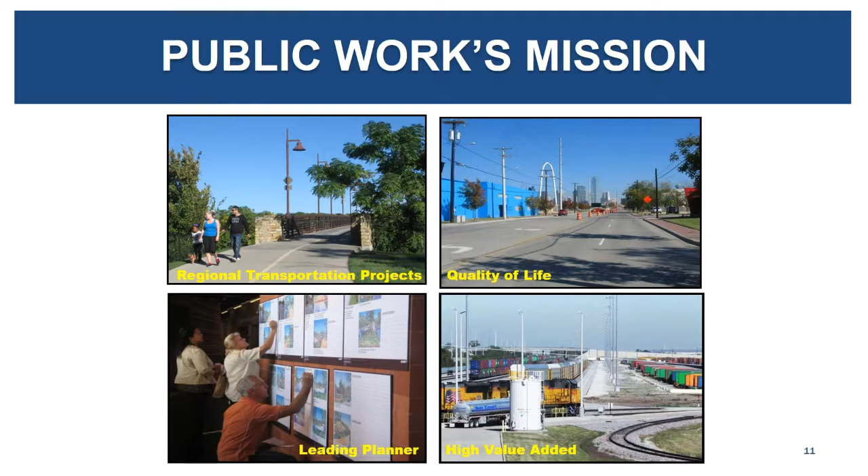So what I'm going to do now, if there's no further comments from the commissioners, we're going to go ahead and turn it over to our consultant and to Micah Baker and his team that's been leading the way, along with some other players from Public Works that are here. So with that, Micah, I'm turning it over to you to go through these particular slides.

All right, thank you, Alberta. Again, my name is Micah Baker. I'm the Senior Transportation Planner with Dallas County Public Works, and I'm also the Project Manager for the FM 1382 Sidepath from the county. As Alberta mentioned, we have Jacobs Engineering as our prime consultant on this project, and we'll have some slides coming up where myself as well as Jacobs will provide project details about FM 1382 Sidepath.

The project stakeholders or agencies who have been involved through the design of this project include Dallas County as the lead agency, TxDOT, who is a primary funding partner as well as the owner of FM 1382 and the right-of-way where this trail will be located, and the city of Dallas. We also have the cities of Grand Prairie and Cedar Hill who have been involved because of their proximity to this project, as well as other projects going on in those cities. And then we also have the U.S. Army Corps of Engineers, because this project is located just to the northeast of Joe Pool Lake. The Corps is the adjacent property owner to this trail.

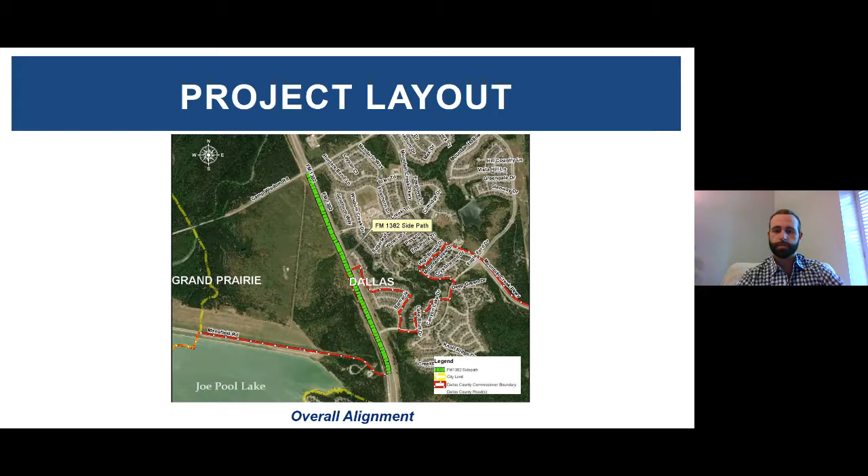So this is just a good map to show the project location. You can see the green line on this map is the FM 1382 Sidepath, which goes from Camp Wisdom Road at the north all the way to Mansfield Road at the south. Mansfield Road is the entrance to the Joe Pool Lake Overlook, as well as the Joe Pool Lake Dam. And again, that's a distance of about 1.25 miles.

As you can see, this is entirely within the city of Dallas. But if you see on the map, there's a yellow line on the south and west edges of the map, and those are the other nearby cities of Grand Prairie and Cedar Hill. And then I'll also point out the red line that's meandering through this map is the commissioner boundary line. Where it crosses our project is pretty close to the halfway point of the distance of this project. Next slide.

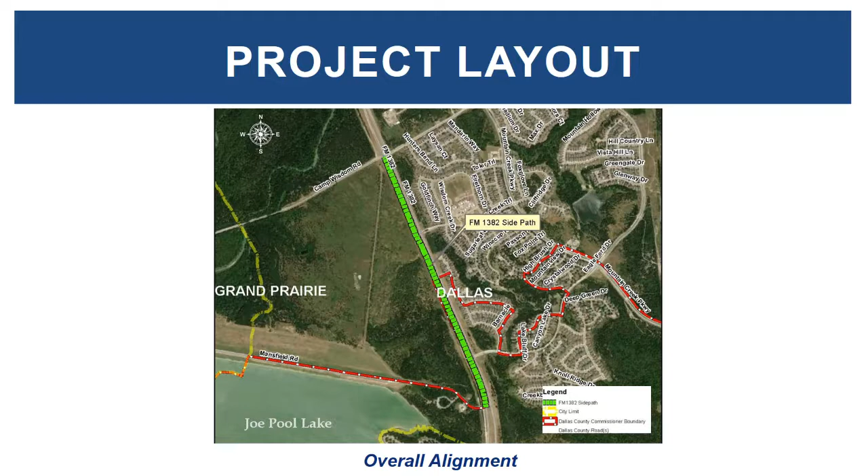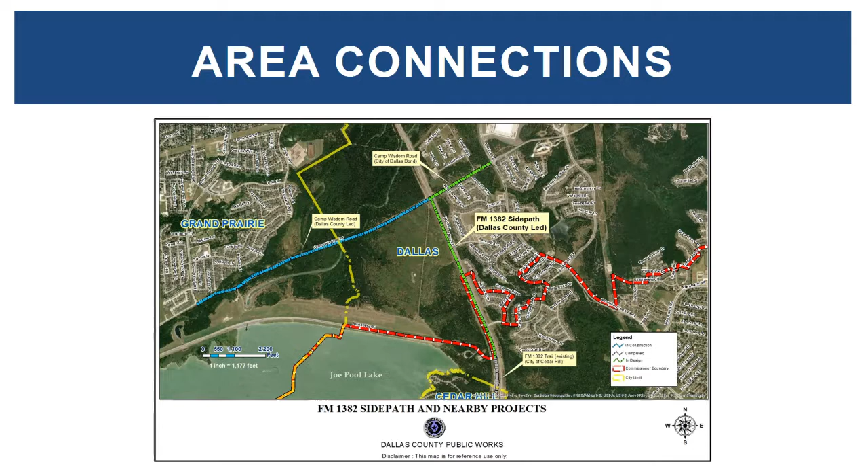All right, next slide.

So now I'm going to take you through a few photos just to give you a glimpse of the project, and then I'll turn it over to Jacobs to go into more detail.

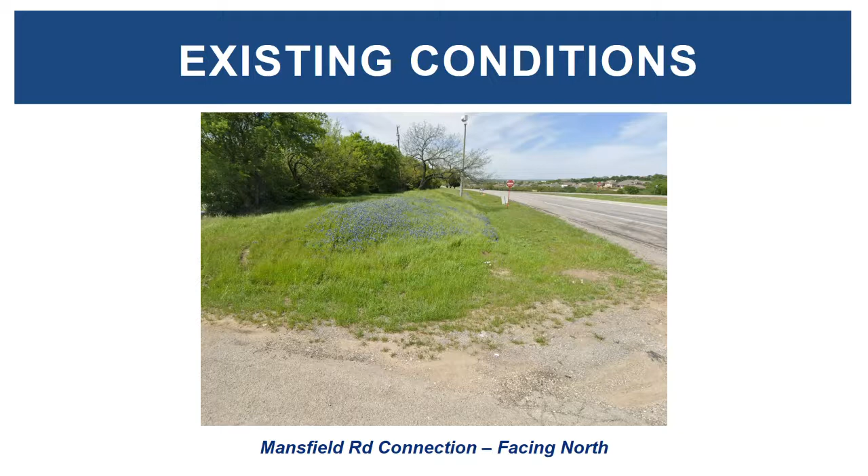This is a photo of where the trail will be located. This is the southern limit of the project at Mansfield Road, looking north. If you were to turn 180 degrees from where this picture was taken, you would see the existing FM 1382 trail that the city of Cedar Hill built. One thing to note is that if you look to the left of this image, you see a tree line that's pretty close to the right-of-way line and the Corps property. So the trail will be located close to that tree line to provide a safe distance from the vehicles using FM 1382, shown on the right side of this photo.

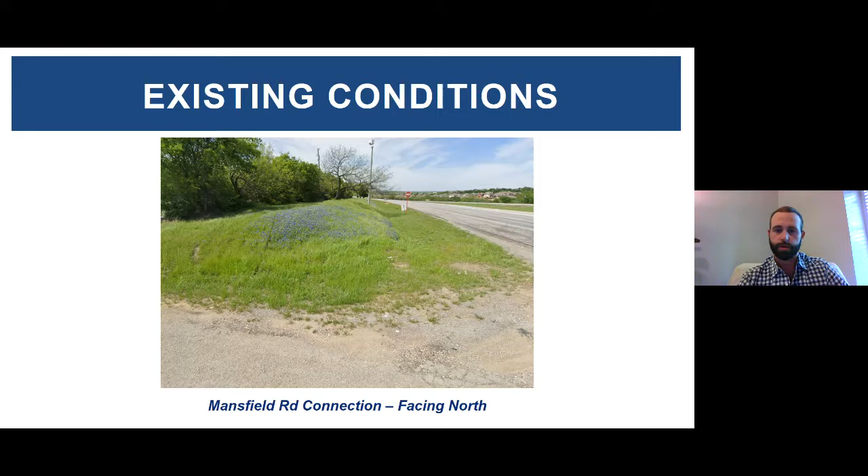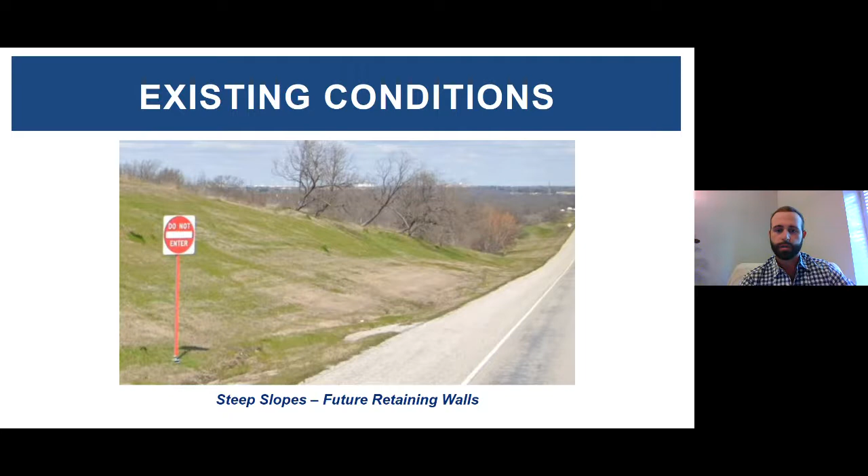Next slide. So a few other general project details.

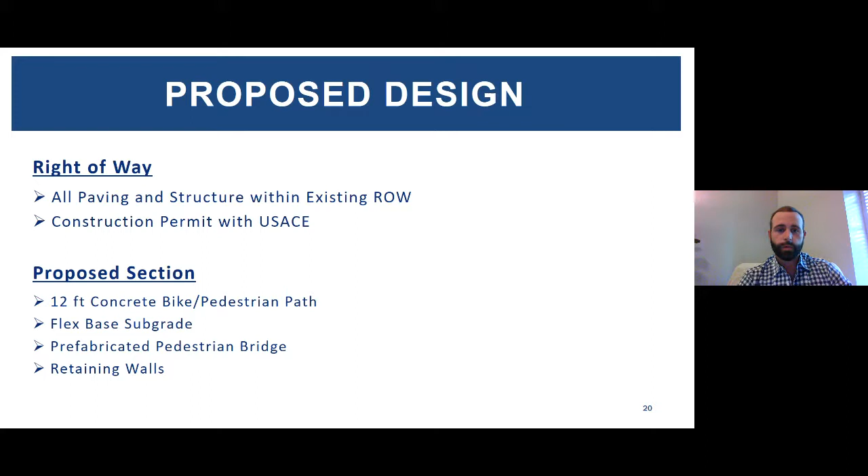Again, the paving and entire structure that's going to be built with this trail will be built in the existing TxDOT right-of-way. We do have a construction permit with the Army Corps of Engineers to provide the necessary slopes for drainage, but again, we will not be getting past their fence line on this project.

The proposed section details include a 12-foot wide concrete bike-ped path. We'll have flex base subgrade. There is one prefabricated pedestrian bridge that's going to go over the existing culvert on this project. And there will be some retaining walls throughout the project that our consultant will describe in further detail on some of the later slides.

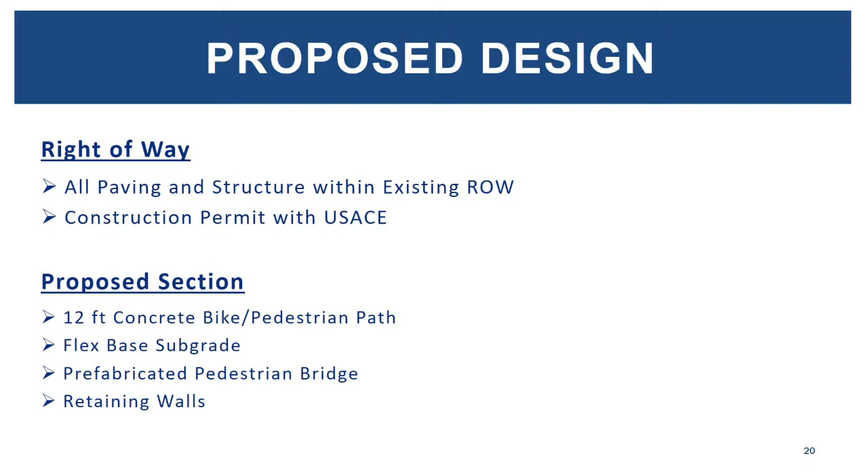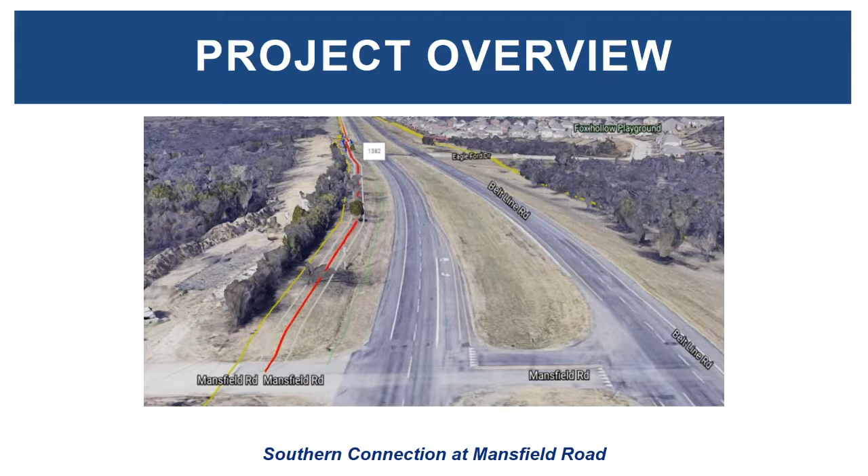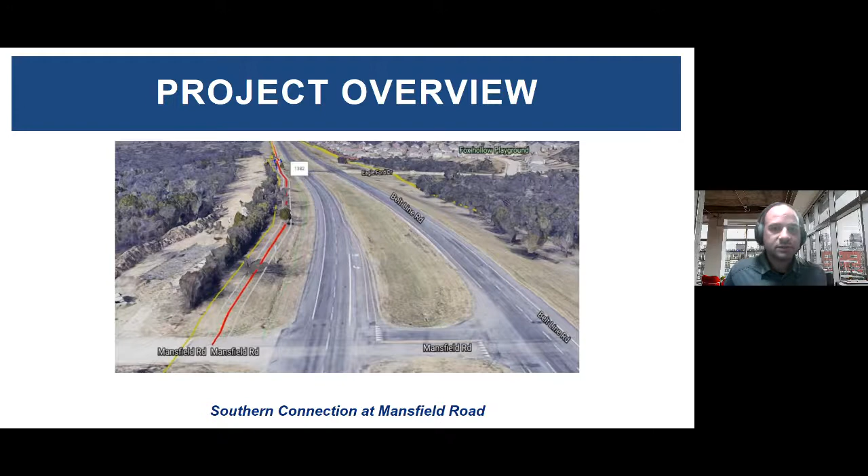We'll start the project here, as far away from the high-speed roadway as possible. We have 1382 southbound lanes, 2 lanes, greater than 45 miles an hour, so we made sure the trail was as far away as we could get it, but not outside of the TxDOT right of way.

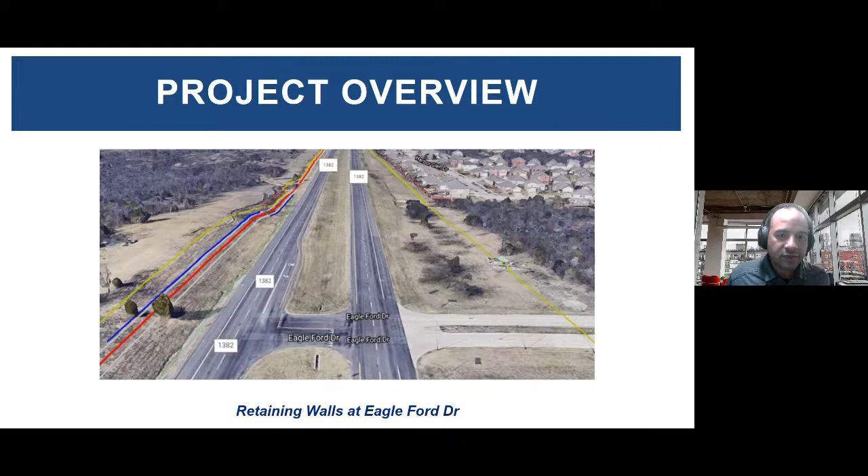As we move further north, we get into the first set of retaining walls. These blue lines on either side of the gray lines are the retaining walls. We have one on the high slope, which we call the high wall, or wall A, which retains the existing slopes coming from Joe Pool Lake. We have a 4-foot maximum wall with a flume behind it that runs and drains to the northern culvert, which we'll get to in a second.

Then we have a secondary wall on the right side, or east side, of the trail. We call that wall B, or the low wall. That is a typical TxDOT cast-in-place wall. Both of these will have aesthetic treatments matching the Cedar Hill trail, and wall B, this lower wall, will have pedestrian railing to ensure safety for everyone traveling either by foot or by bike along this particular trail.

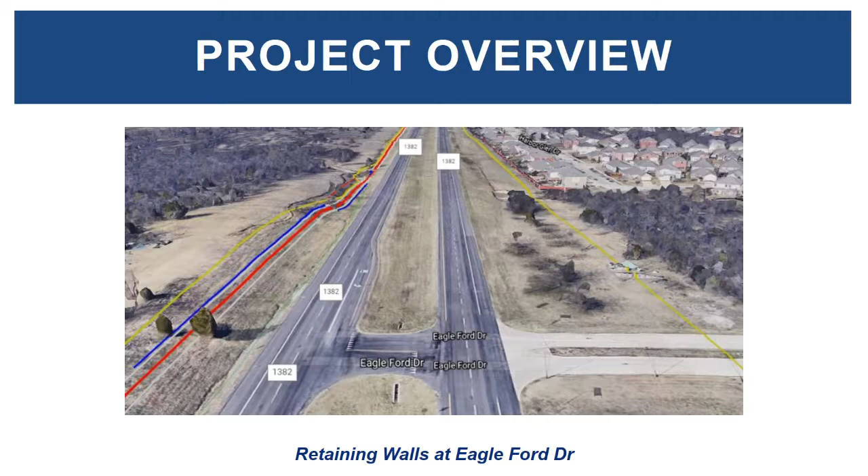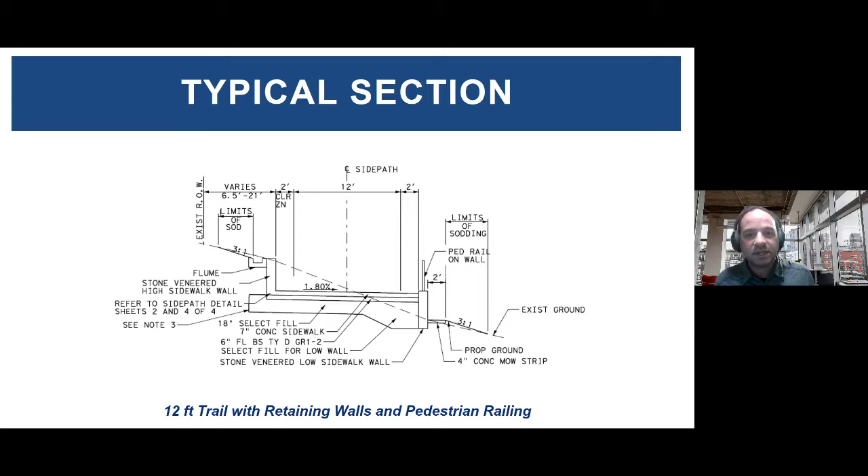Here's a typical section showing both the high wall on the left with the flume and the low wall on the right with the railing and a mow strip to allow for ease of maintenance. In this section we have the 12-foot typical trail, and we're required to have 2 feet of clear zone on either side of the trail in case you need to step off for a second. This extra 2 feet gives you that opportunity. We don't want to make anything difficult for any of the folks who use this.

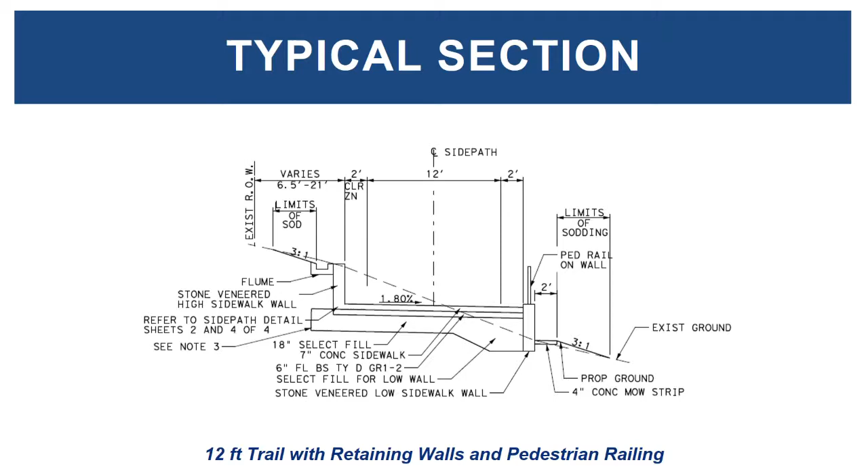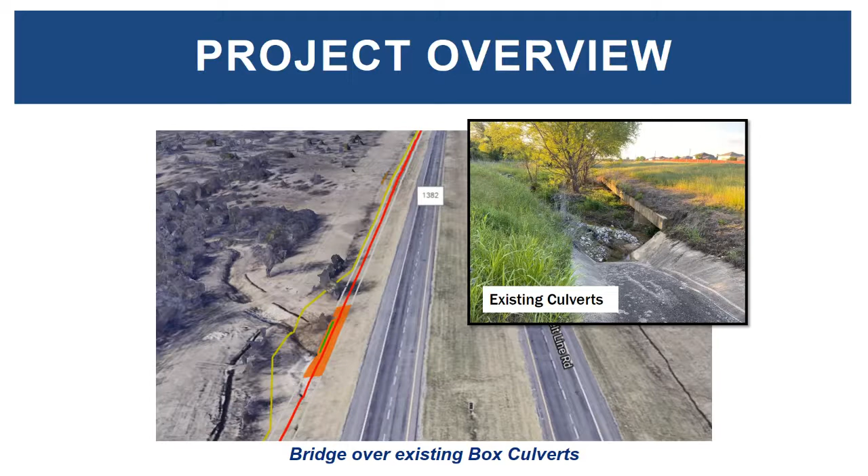As we get towards the bridge, shown here on the left as an orange rectangle, we're going to span over the existing culverts. There are 5 8x4 culverts shown in the picture in the upper right-hand corner. We will not modify any of the hydraulics or structure that's there. We would rather span over it with a 130-foot prefabricated steel truss bridge.

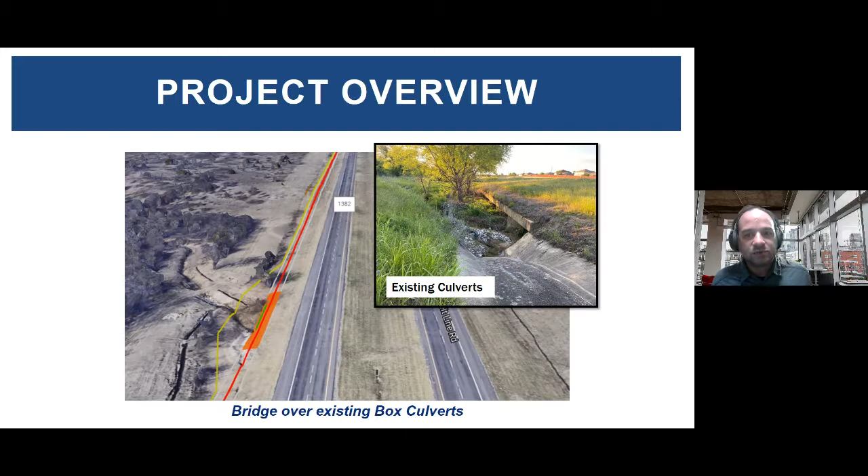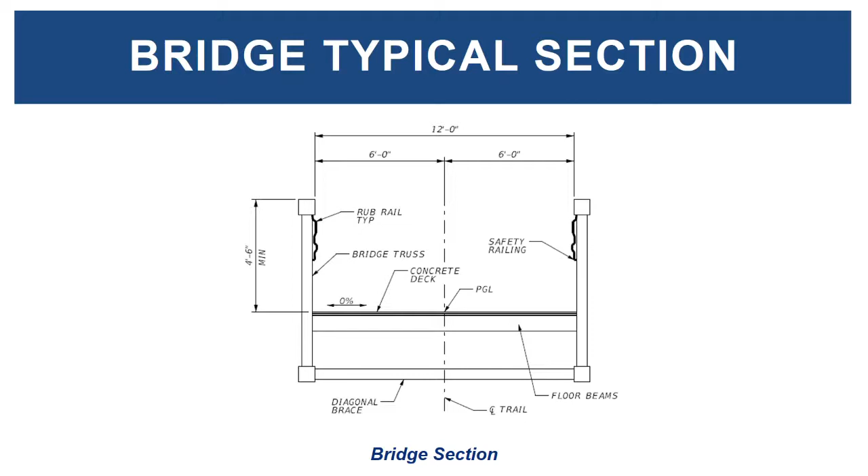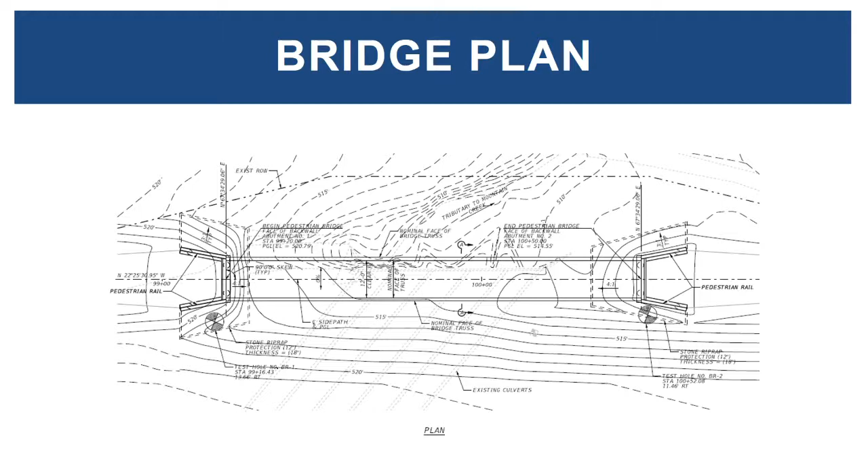You'll see some slides here showing what the bridge looks like, both in typical section with 4.5-foot railing on either side, and a 12-foot width to allow the entire trail all the way through. Here's a top view of that bridge spanning over the existing culverts in plan.

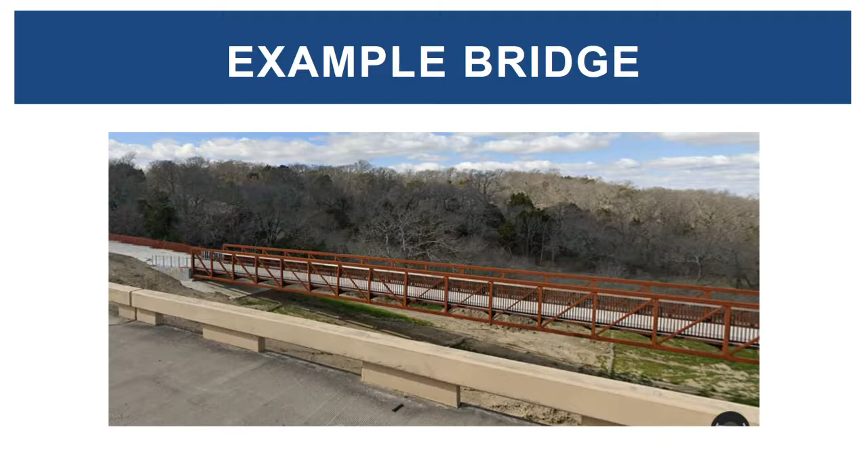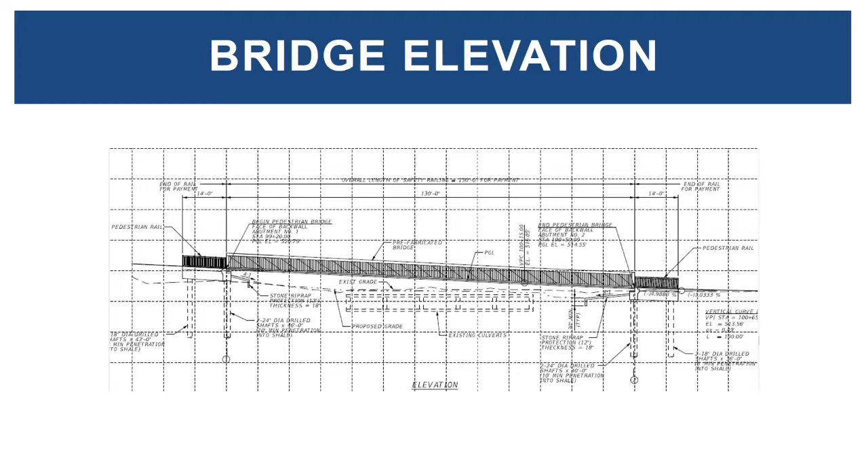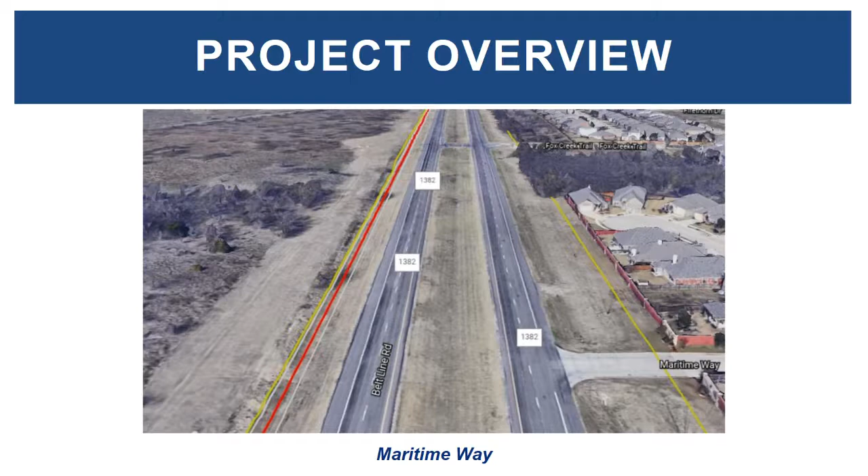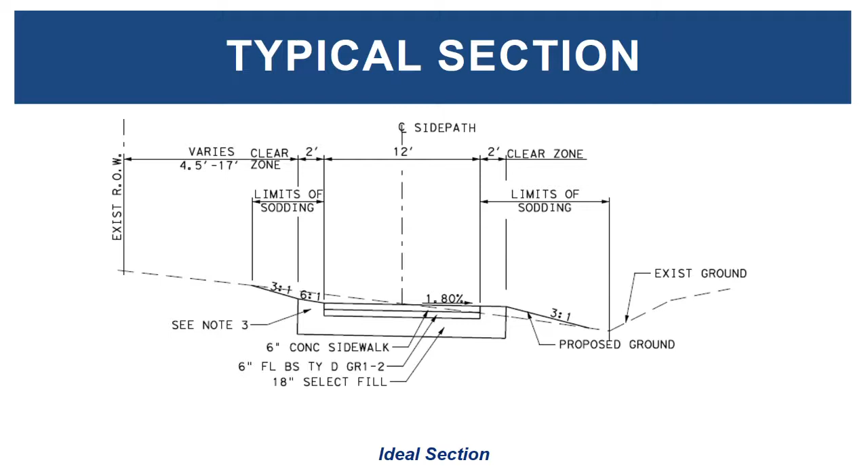Here's a section of that view. So we have the 12-foot trail, 2-foot clear zones on either side, and 3-to-1 maximum slopes with ditches between the roadway and the trail, until we get to the northern terminus, where we will tie in with the Mansfield Road trail.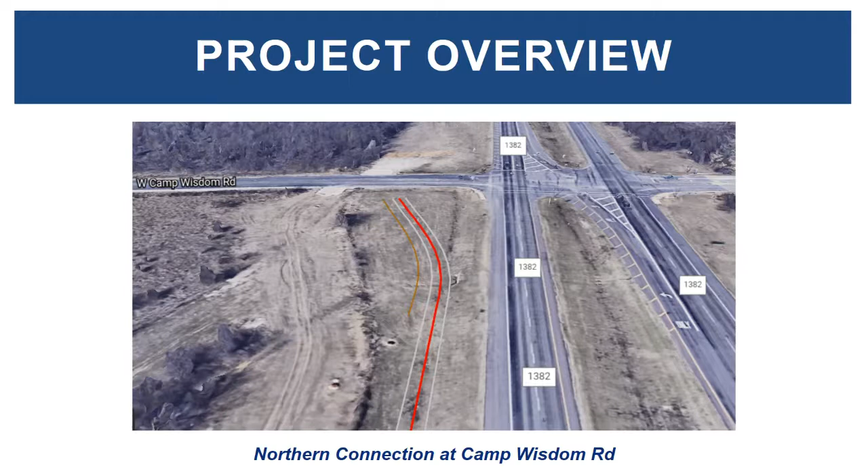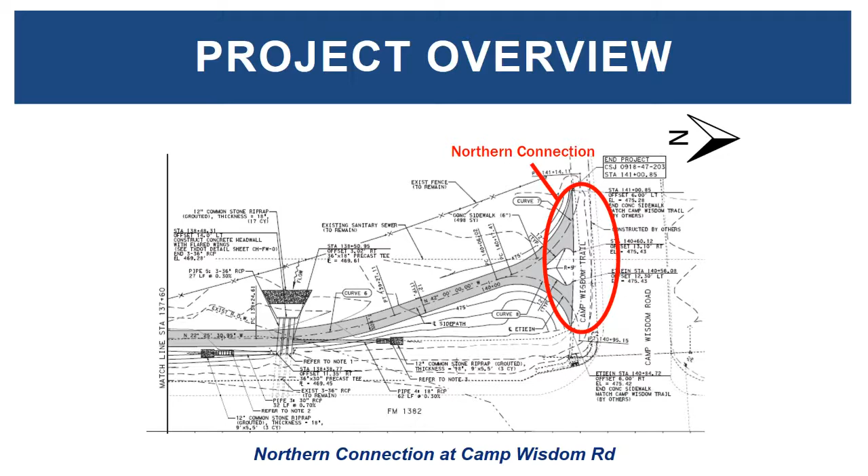And that will look like this. So we're creating a Y connection with the trail, looking from left to right, south to north. This connection will allow easier movement from eastbound Camp Wisdom Trail to southbound, and a little bit of easier stop and go connection as you go from northbound to eastbound and several other directions. This is the type of Y connection we're doing there. You can see other drainage features we're extending to allow for continued drainage in the area so we don't get any flooding on the trail.

Here's another view of that connection from the Camp Wisdom side. That northern Y connection would happen here at this red circle. This is looking east to west, left to right on the screen. We would make that Y connection, and there would be easy movement both east and west, moving north and south on the Sidepath trail.

And so that, I will turn it back over to Micah to go on with the remaining slides.

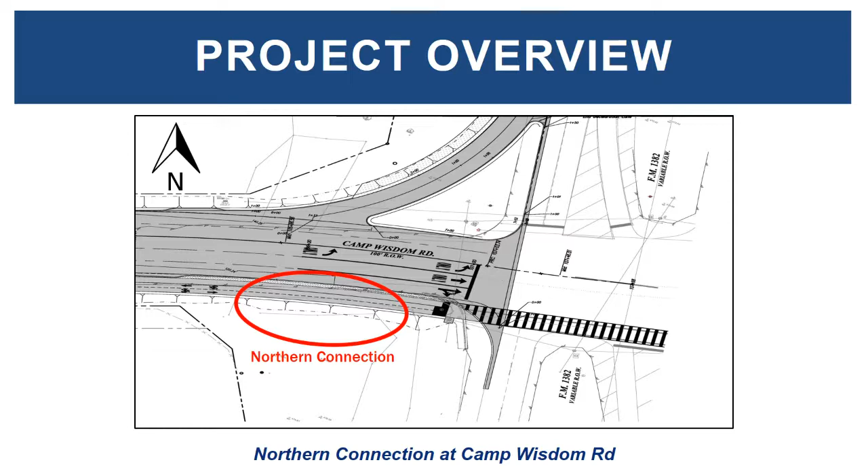Thank you, Carlos. So we've got a couple slides here about the project cost and funding, just to give a broad overview. The paving and drainage construction cost is $1.88 million. In addition, the design, project delivery, and admin cost, much of which has already been incurred, was $555,000. So the total project cost comes to $2,435,000.

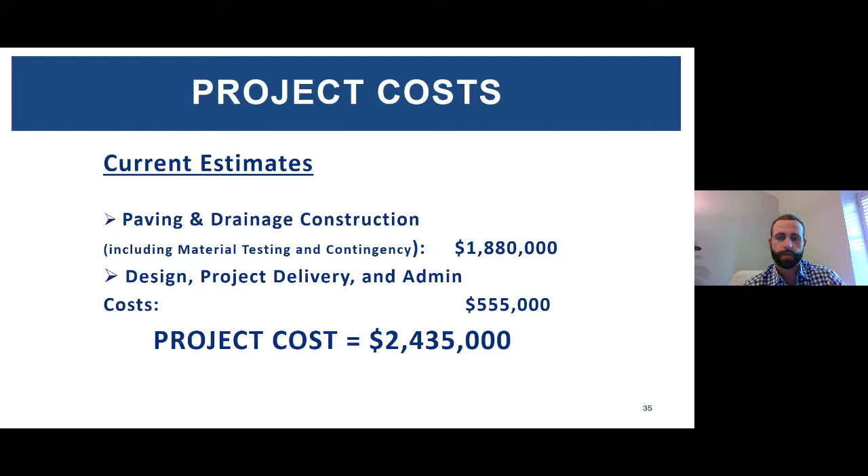Here is a glimpse of the schedule. The items in blue have already occurred, and the items in red are upcoming. Dallas County executed our project-specific agreement with the City of Dallas in May 2019. Then we executed our design contract with Jacobs in August 2019. We had a kickoff meeting with TxDOT for this project in September 2019, and then initiated the design. We received environmental clearance in October 2020, and recently submitted our final 100% plan set to TxDOT in early May. So today we're having the pre-project public meeting.